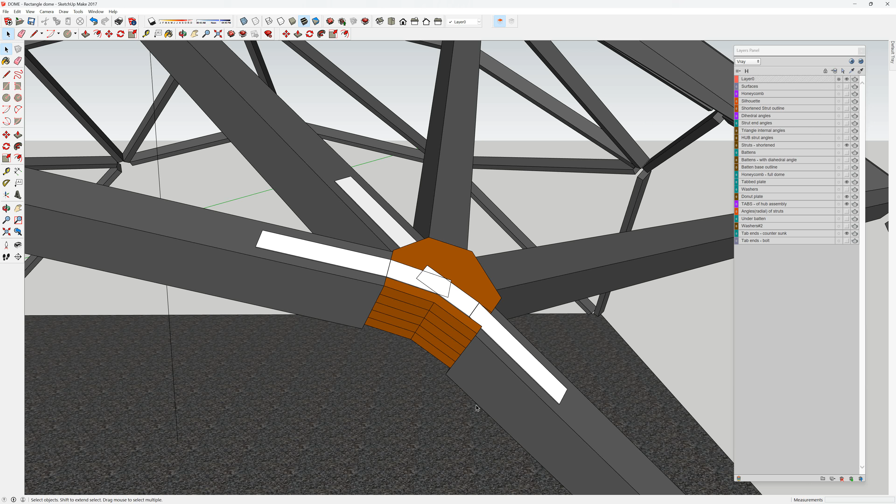I have done, as I've shown in the other video, filled in the gap in the space that would be occupied by a bottom, the struts that have been shortened, but has a bottom positioned hub.

Rather than putting a top hub in here, which I would be doing, I thought I'd look at this because we'll step through it. Now, just for the exercise, we're pretending that we've got the straps coming along here and attaching to the infill block, we could call it. So we've got a couple in place.

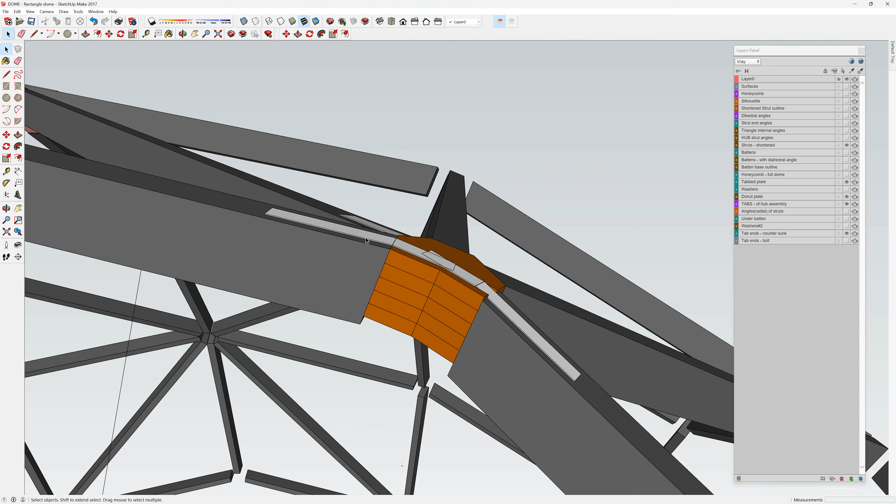Some of them will have to be grooved. For personal preference, I've lifted this laminated hub up to the highest point here, and all the others would have to have a bit of a trench cut into the positions there for the straps to lay flat. Not overly demanding, so that's all well and fine.

One thought exercise gets dispelled quite quickly. If we get rid of the straps for just now, we could be left with a block like this that infills the gap, and therefore you could imagine that any force coming down here would be directed through the block.

Ditto here. You could imagine the loads imposed by whatever snow or wind being directed right through these 3 struts, through the block, and these 2 here, mainly this one, but this one effectively the same element in the structure, would take the force and then dissipate it, direct it down this strut.

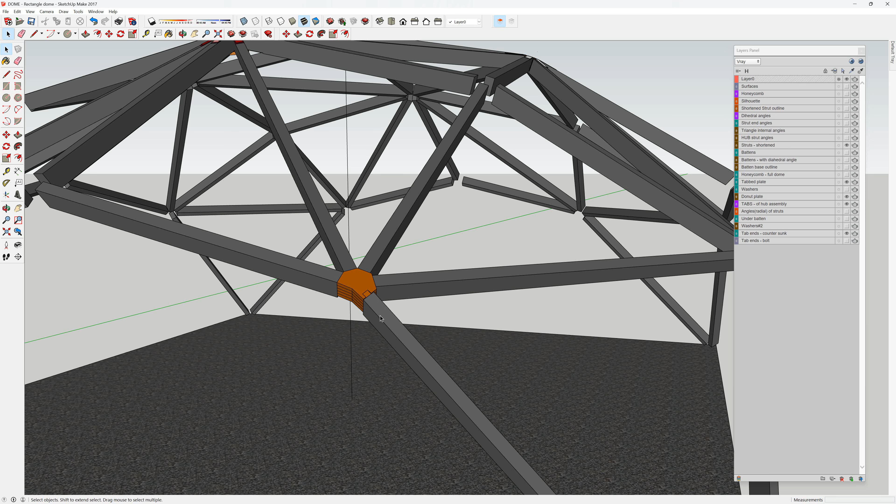I know, you could even go to the extent of saying maybe there's 4 units of whatever, let's just pretend 1 unit of energy each. So there's 4 potential units of energy coming through this one piece of timber. And that is why this one here has the most demand as far as the joint's concerned, and for the energy to stop any deflection.

So you may want or deem it necessary to have internal gusset or bracing, or whatever you want to call it, stiffening members in this leg. That is why I kept on saying I'd more than likely have an extra bit of structure, framing, in the 2 triangles on either side of this triangle. That's so the energy can come down and have an alternate and extra, bigger path to be directed.

But to be fair, it is particularly nice and pleasing to see a geodesic dome with this sort of structure. So I'm working on the fact that I might just have it like this, or someone else might. So we've got to accommodate that sort of logic and thinking. Anyway, I haven't even got to the point of the video yet. That's off in the way.

But this block could augment a bottom plate position and a top plate.

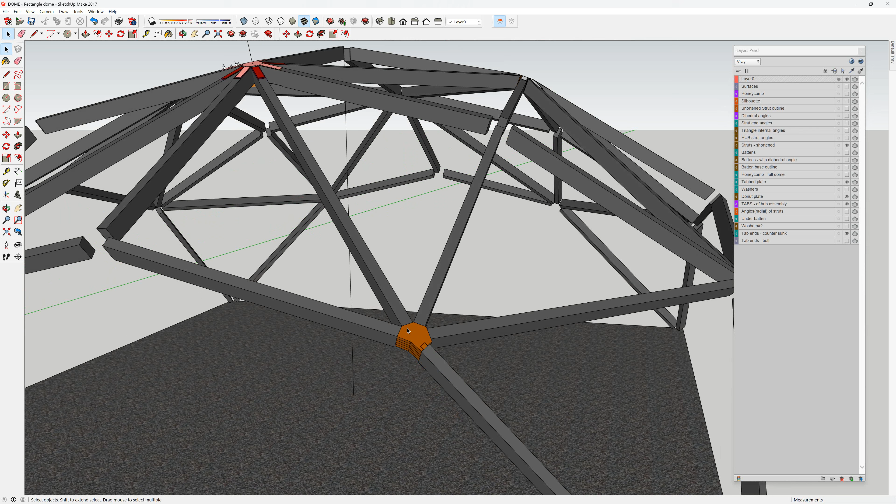So you're still having the equivalent of this, where we've got a bottom position hub and a top position hub in this position. That's what I'd be doing anyway. But if we put this block in, which is just a few pieces of plywood laminated and glued together, does that help stiffen the whole assembly?

The plates, or the hub as it were, become not secondary, but helped. The fixings become a little bit less stressed. It's a dangerous comment I'm making, but they become not as stressed, because the energies are going through a solid component rather than through space.

If that weren't there - don't worry about those lines, let's just delete those - if it weren't there, then all of the force has to be directed through the metal and the bolts or screws. If it is there, then it just augments, helps, compensates, or expands the stability of the joint. Let's just leave it at that.

Now, I think this looks a little bit ugly, and it probably only looks that way because I've contrasted the colour. What if, and this is just an if, we do away with that and we mitre the timber together?

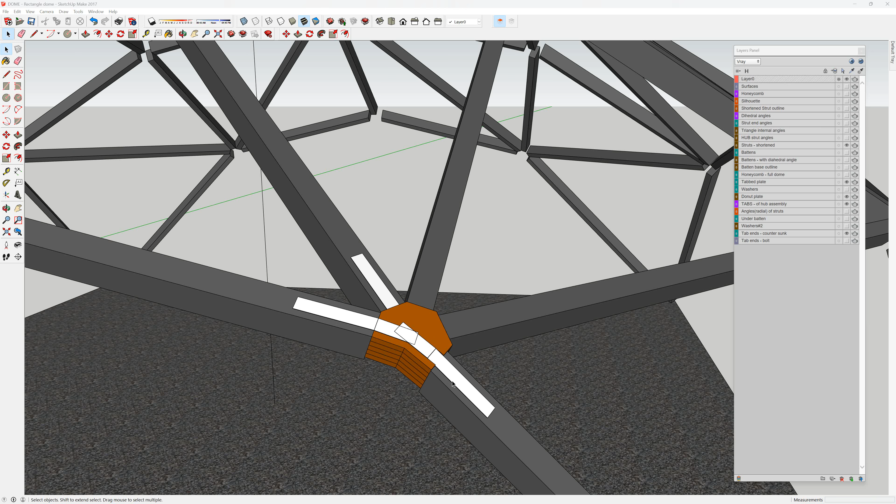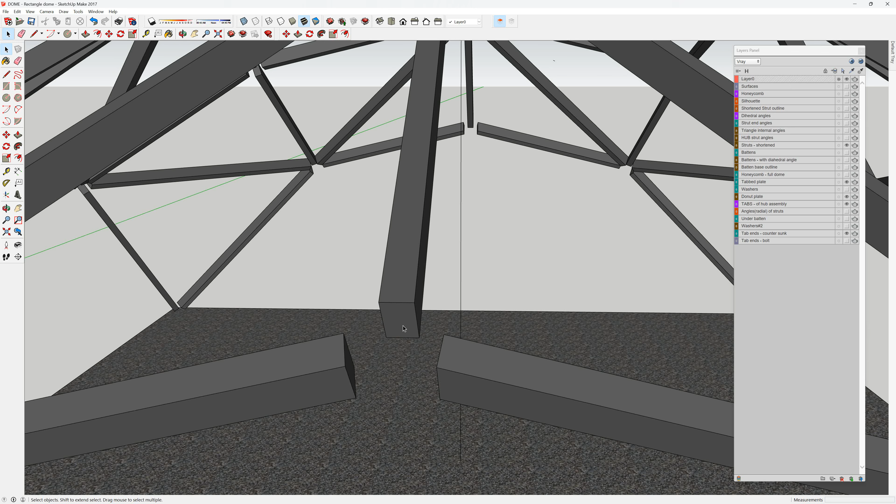Oh, that sounds a good idea. Oh, I might do that. I'm going to do it here, as is likely, very very likely, that I mitre these two together, then this one. Okay, that's a really good idea. Well thought of, Dave. Glad the way you think is the way that you think as well. Amazing. So, I've gone and done it. Oh, look at that. Isn't that so a pain in the ass?

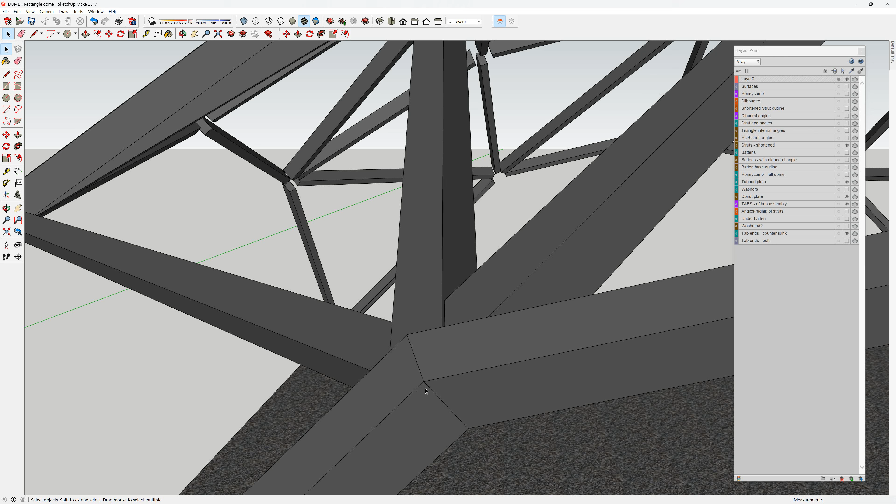Yes, it is, indeedy. Doable? Oh yeah, but wow, the angles and precision to mate all these up starts to become a joinery job. And that's not something I want to do in this hub strut dome exercise, not in the drawing and not in reality. I'd rather have that gap, and this does look good.

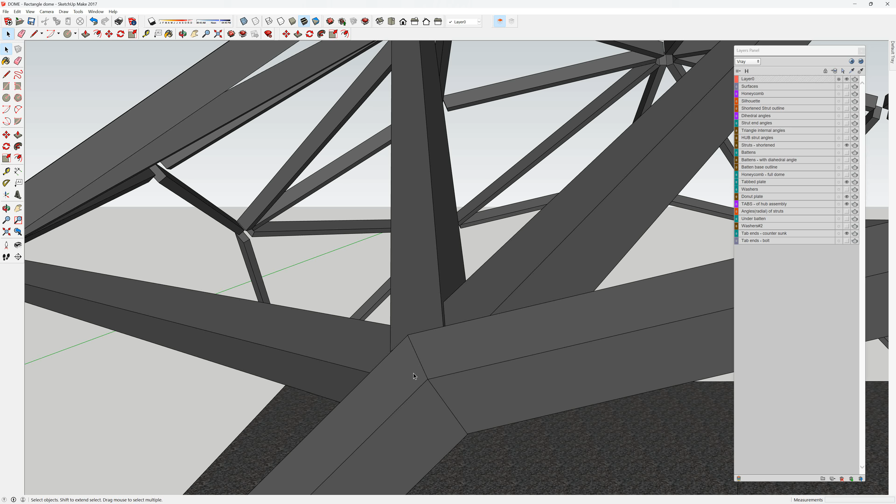I'm going to give you that, and if you've got the patience, good on you. But it is a bit demanding. Would I even consider it as an exercise if I was out there building the dome? Well, I'm really thinking about it.

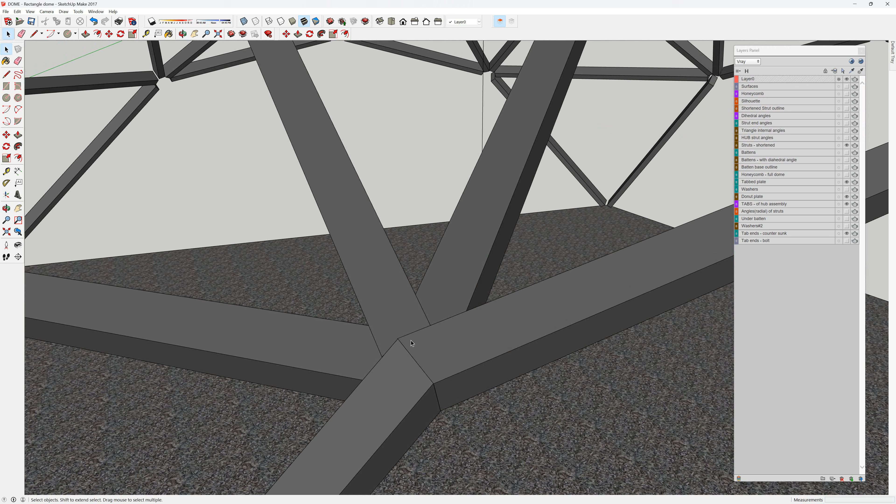I'm thinking I might entertain it on a second dome. I wouldn't want to entertain this as my first attempt at making the dome joint. It is probably as demanding as anything on this dome. And why?

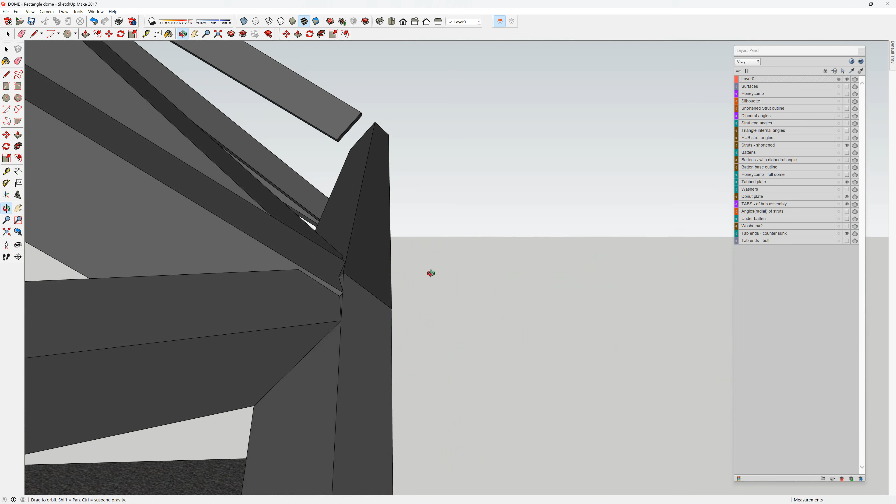Yeah, why? It's just the aesthetics. Oh yeah, hell, go ahead, do it like this - it'll look fantastic from underneath. Oh, it's still got all the lumpiness. That's dead right, there is no panacea.

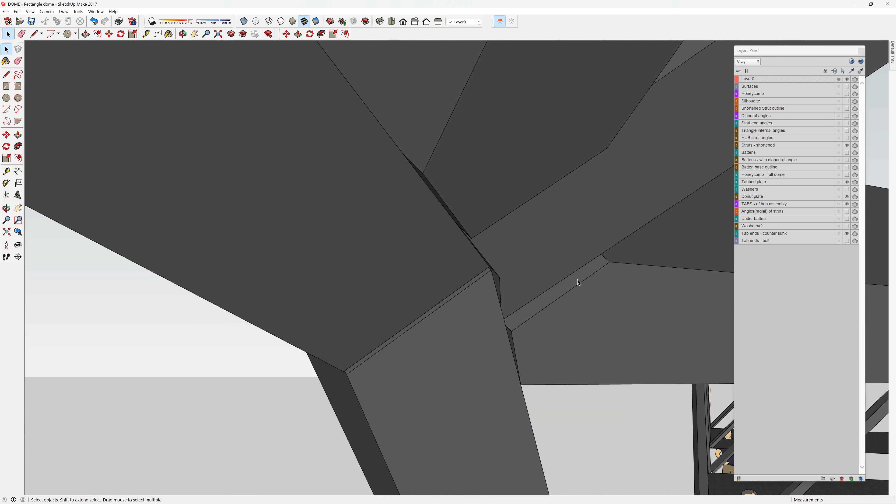Could you lift this up and make it more flush? Yeah, you could, a little bit. Yeah, it's got that tapery triangle thing going on there, and yeah, you could lift it up. You could, there's lots of things you could do, but really, do you want to? I don't.

And as I said, this becomes a question of: if you're a master builder, master joiner, whatever, great. My building capability - have I done this sort of thing before? No.

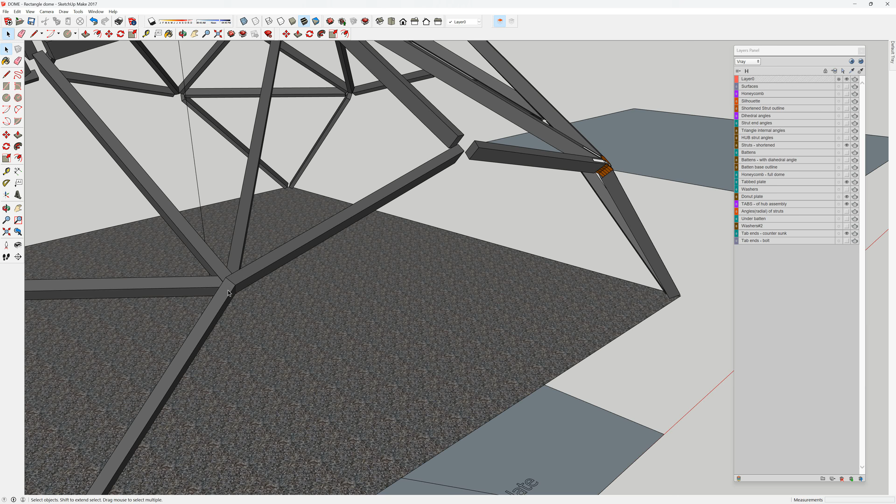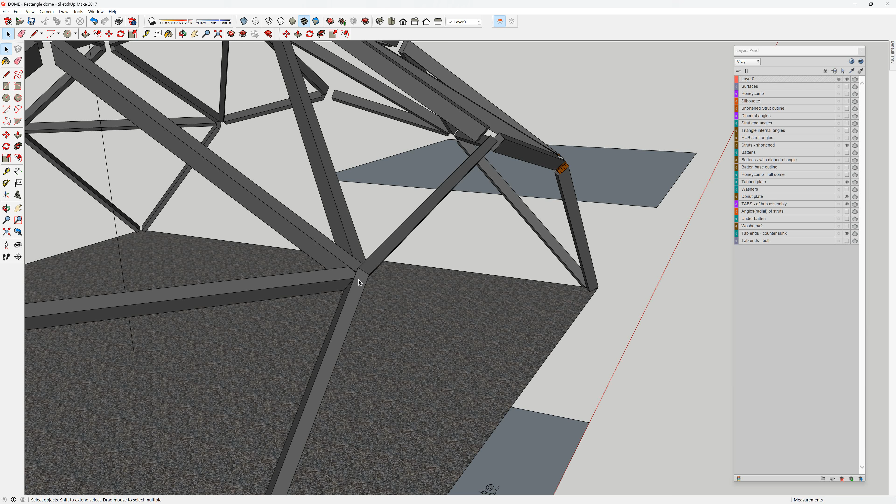I've got close to it, sort of, when you pitch a roof and all the common rafters and the hip rafters come together and there is a geometry. The common rafters generally just get a plumb cut - that's fine. The ridge board coming along, sometimes that could have a bevel cut on it - that's true. But the hip rafters quite often will have a compound set of cuts put on it, depending on the approach that the hip has been created with.

So, and how well did that work out, Dave? Well, don't ask - good, but not great, I've got to say. So those that have done a lot of that sort of work will know, and there is a skill set required for that to be achieved. And the average builder, I'm going to say today, won't have that.

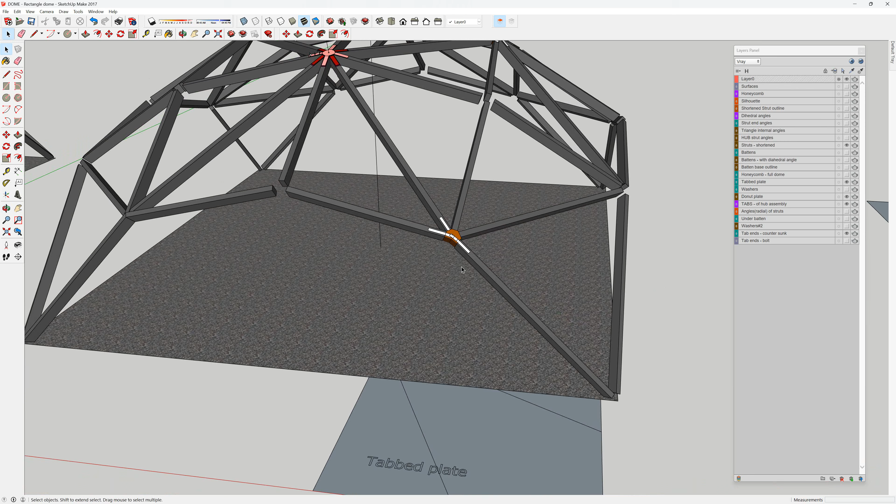Specialist builders, I've seen some amazing joints, it's like, how do they get there? That's great, but that's not me. I'd like to pretend I'm that experienced, but I'm not. This, however, I think myself and the average DIYer could do. There's some things I wouldn't recommend a DIYer to do, but this one, hell yeah.

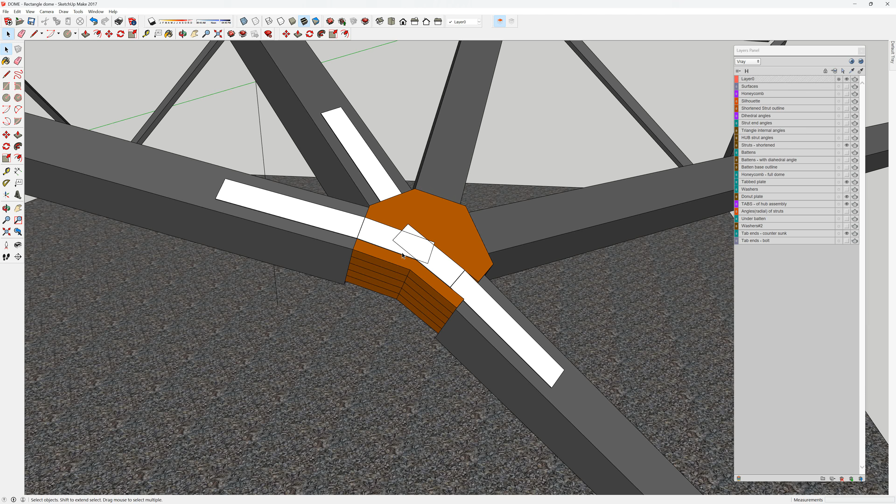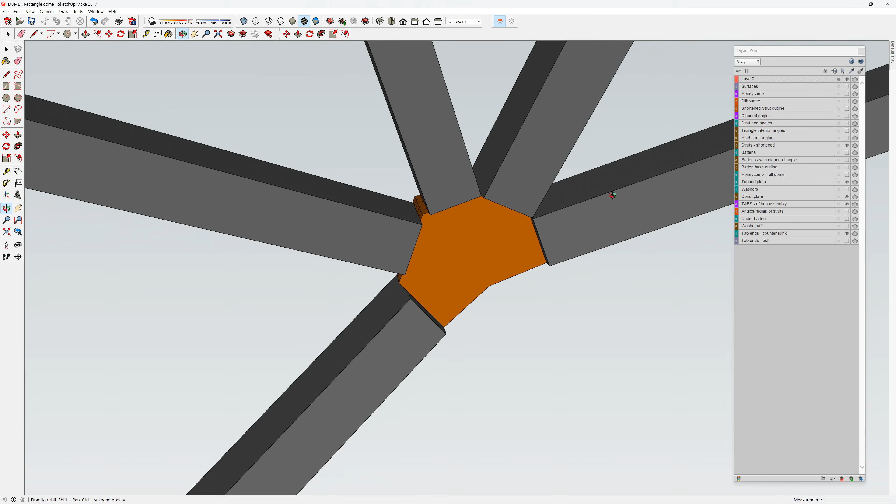Once the pattern has been determined within your drawings, because you're following the videos, you'd be able to create this shape in SketchUp or the equivalent. Print it out, take it to the workshop, make sure the measurement is correct, amend, scale, shrink, whatever's required, and cut it on your miter saw. No rocket science, no complex compound bevels, they're all straight cuts at an angle. Laminate together, bolt, glue, screw, whatever. Done. You'll wind up with probably as satisfactory a joint as anything else, and it looks quite neat.

Don't you reckon? Now, reckon, it's an old Kiwi bit of slang there.

So if that was the look you wanted, great. There's another benefit of having a timber plate there: you can mount things to it, maybe a light. Now you're saying, Dave, forgotten about the plate? I'm going, mount it to the plate, under the battens, with an extra plate put in here, you could have something mounted to it. You're not worrying about the steel.

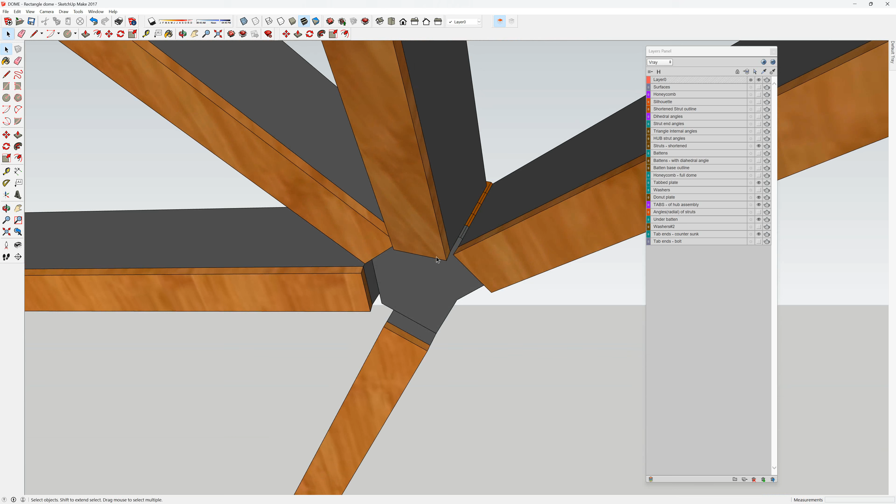Anyway, I do go on. Which one would I like to see on my dome? Oh, this one, of course I would. This one, of course, because of all the things I've just said.

This joint here may well be tapered, but mitered together. Might be. But if I'm going to have a top and bottom plate here, well, maybe I just go with consistency, and that also means ease of construction.

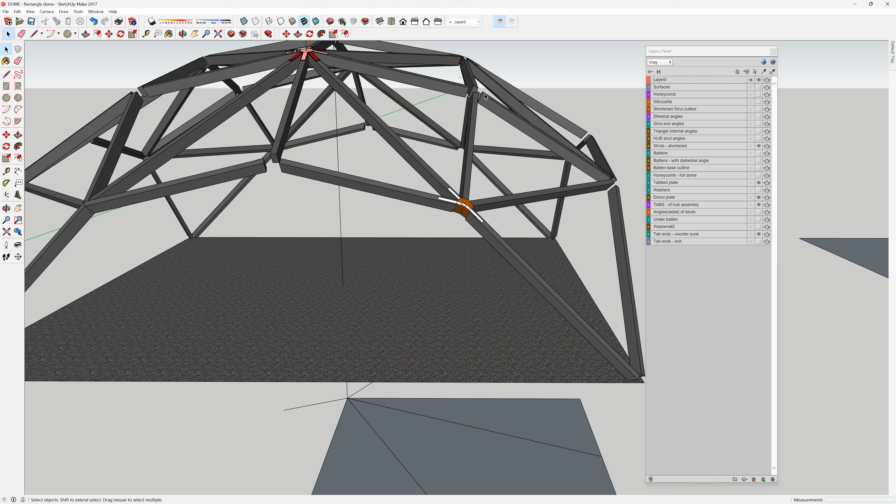So, food for thought. You can do it, I could get the dimensions and angles required for this. It would look particularly smart, but if I did it there, would I want to do it in any other position? And the argument is yes. You may not have seen some of the other drawings, it's not in this model. This joint does go through that exercise and will perhaps be the way I go.

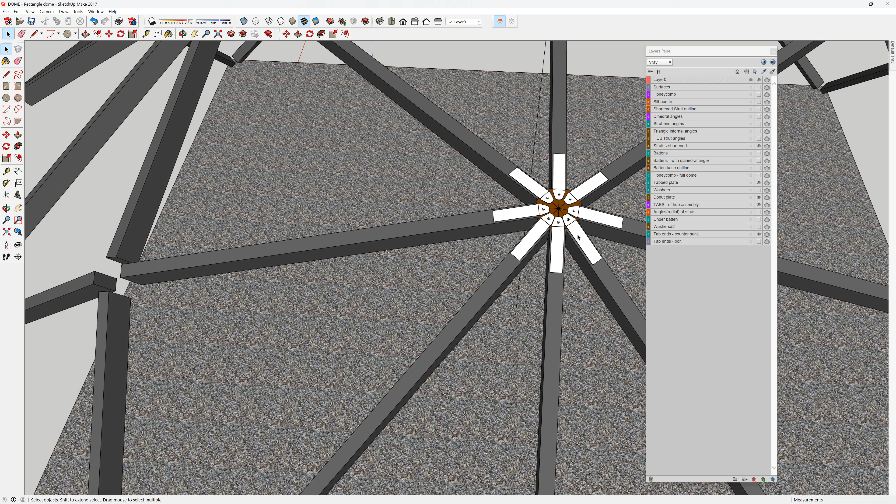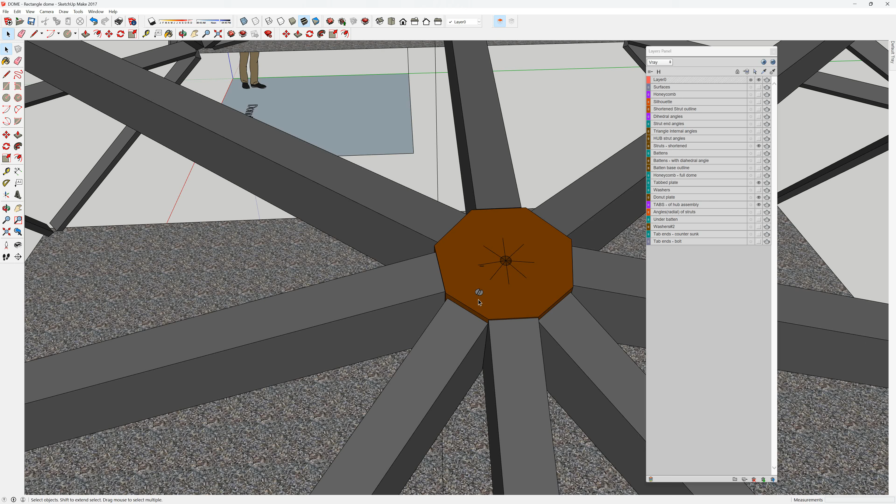The combination of the block, I'm bouncing around a bit now, I quite like that, and it may replace the idea of having these ones here mitered together. I like the idea, but I'm thinking this may be a little less attractive than mitering them together. And these ones here, this situation is more like that pitching the hipped roof sort of thing, the joints are very similar in concept, but for consistency, maybe this is the better way of going.

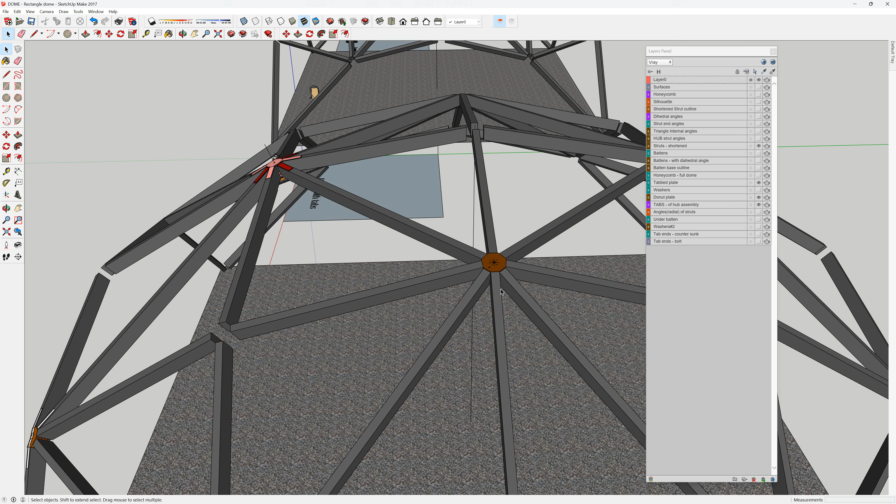And maybe, there's a lot of maybes in this one, maybe the thing is, do this for your first attempt, and there's probably going to be more than one, but make this for your first attempt, and should you gain the confidence and clarity for building it like this, then you may want to consider mitering the joints, etc. So it's up to you, isn't it? I'm just trying to cover as many bases as I deem necessary, and this is one of them.

And at the moment, it will be used possibly in combination with the twin or double layer of the plates here. So, food for thought.